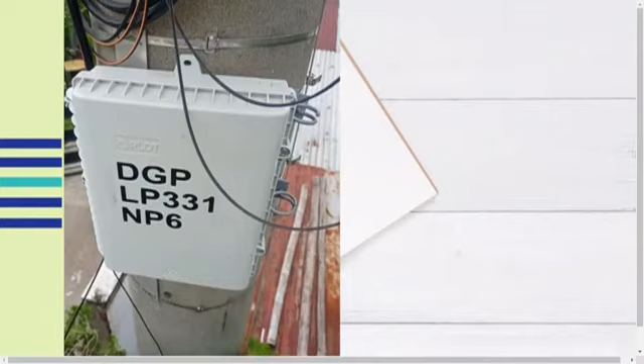Project Zero. Installation procedures. Network access point installation. First and foremost, the technician must test the NAP port using an optical power meter. This procedure is also known as NAP port reading.

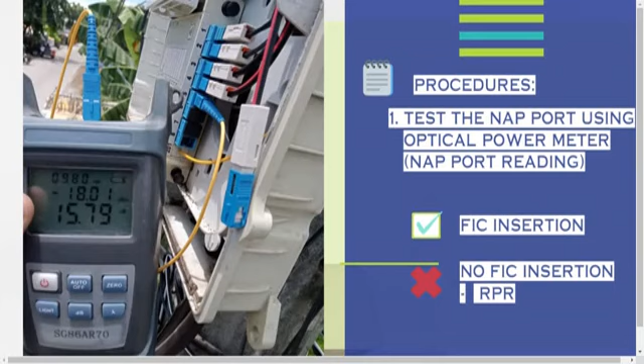The purpose is to determine whether or not the technician could proceed to FIC insertion to port assignment. If the reading is normal, the technician could do the FIC insertion. There are two methods of extraction. Number 1. Using bare hand.

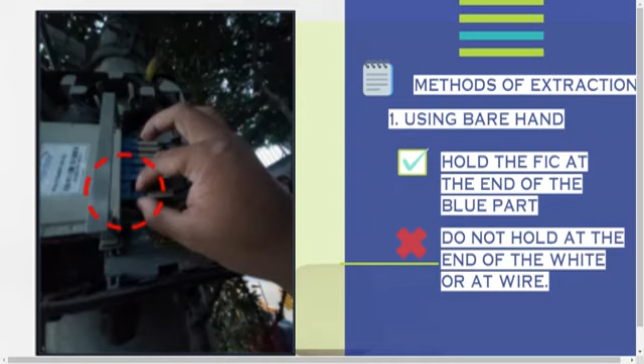Technician must use his bare hand to insert FIC in one port apart. This is done if the NAP has limited space or there are at least 5 line wires on it. How to hold the FIC. Using your index finger and thumb, hold the FIC at the end of the blue or above the white part. Do not hold the FIC at the end of the white or at the wire.

Number 2. Using SC connector extraction tool. Technician must use SC connector extraction tool to insert FIC if the NAP is in full port capacity and double NAP. In using SC connector extraction tool, it should be bent or angled enough to fit in the limited space in between coupler and NAP edge.

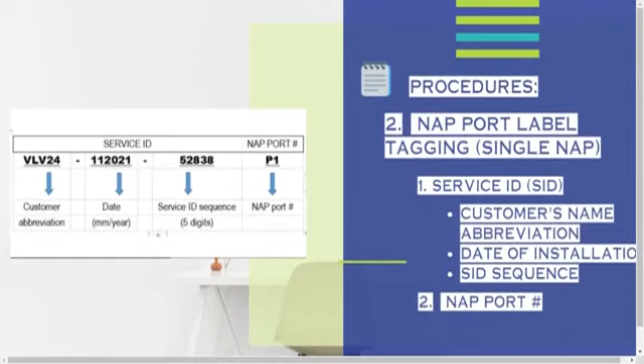If the reading is too high, the technician could not do the FIC insertion, thus falling to RPR. The management requires the technician to take and upload photos of the high NAP port reading on Google Sheet. Second procedure under NAP installation is to do NAP port label tagging.

For single NAP, label details must include the following. Number 1. Service ID or SID, which is composed of customer's name abbreviation, date of installation, and SID sequence. Number 2. NAP port number.

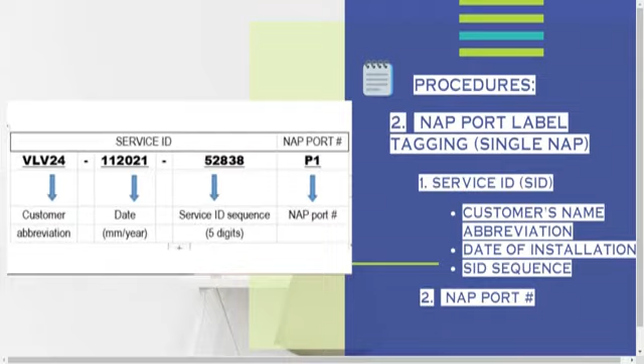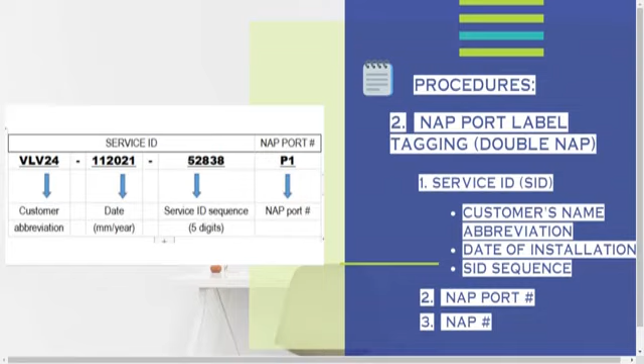For double NAP, label details must include the following. Number 1. Service ID or SID, which is composed of customer's name abbreviation, date of installation, and SID sequence. Number 2. NAP port number. Number 3. NAP number. NAP port label tagging do's and don'ts.

Technician must utilize the following. Number 1. NAP port label details must be printed. Number 2. Use sticker label for NAP port tagging. On the other hand, technician must avoid the following. Number 1. NAP port label details must not be handwritten. Number 2. No using of paper tape for NAP port tagging.

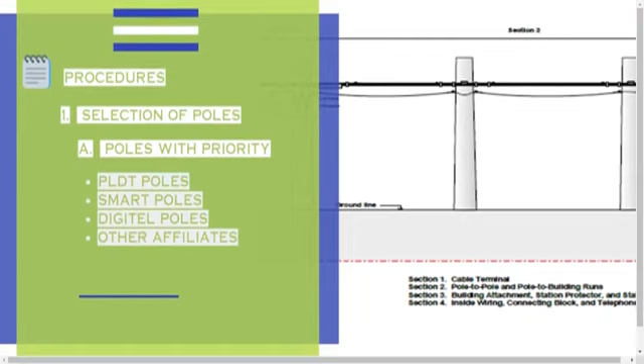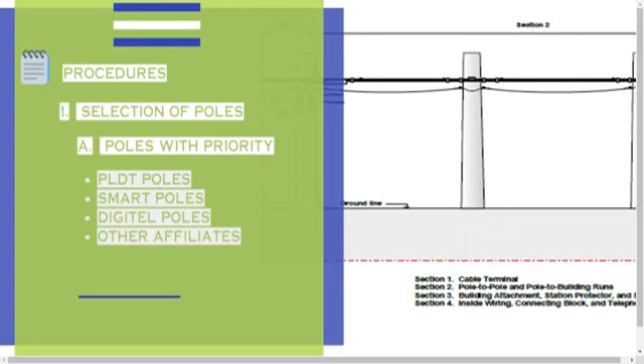Pole-to-pole installation. First and foremost, the technician must select poles according to what the management had notified. Number 1. Poles with priority. PLDT poles. These are poles with painted red or yellow logo on top. Smart poles. These are poles with painted light blue marker on top. Digitel poles. These are poles that have octagonal shape with painted black marker on top. Other affiliates are Clarktel, Subictel, Meritel.

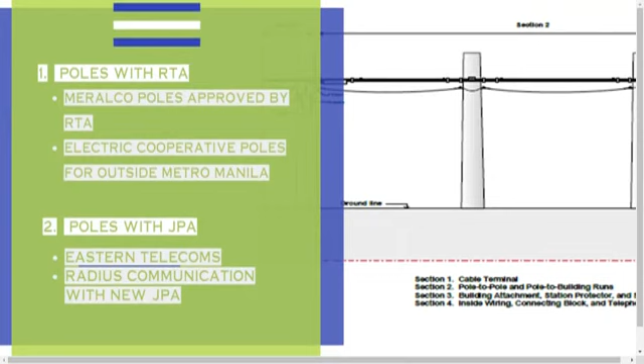Other poles that technician could use are the following. Number 1. Poles with RTA. These are Meralco poles and electric cooperative poles for outside Manila. Number 2. Poles with JPA. Pole-to-pole installation materials and tools needed. F-clamp, tape or cable tie, hook with nut, and mid-span clamp.

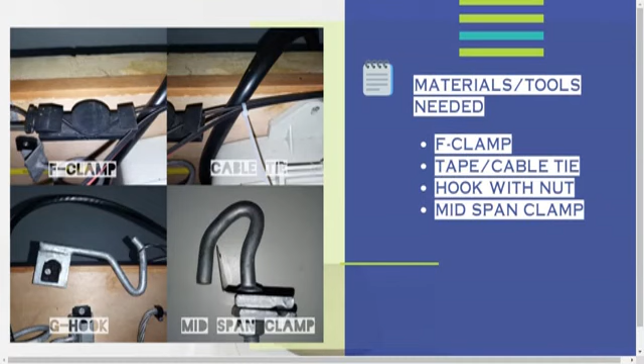Second procedure under pole-to-pole installation is the construction of pole smiley or Mickey Mouse. Technician must provide 4 cable ties to create a pole smiley/Mickey Mouse per techstand. Technician must use 2 F-clamps to release the tension and to prevent macro bend.

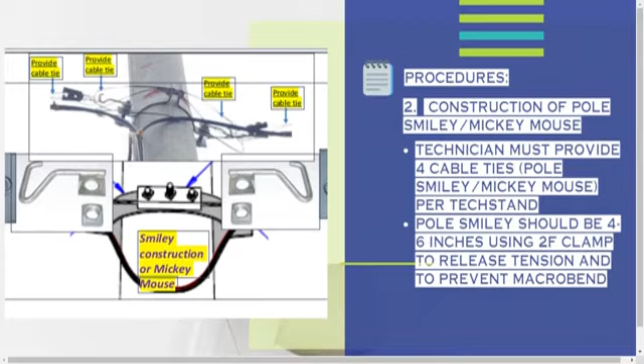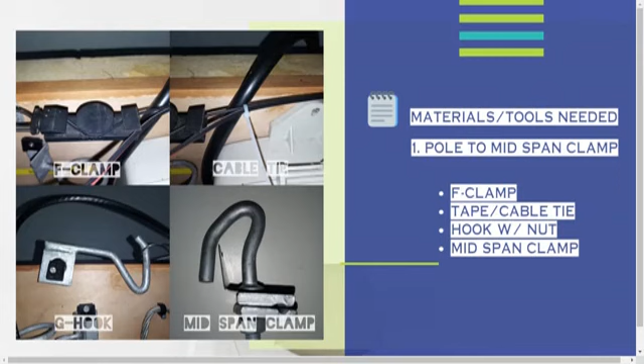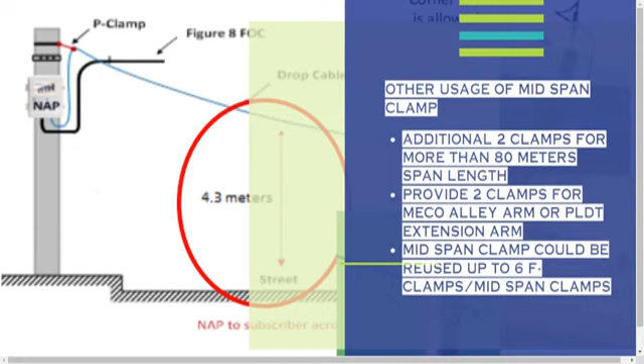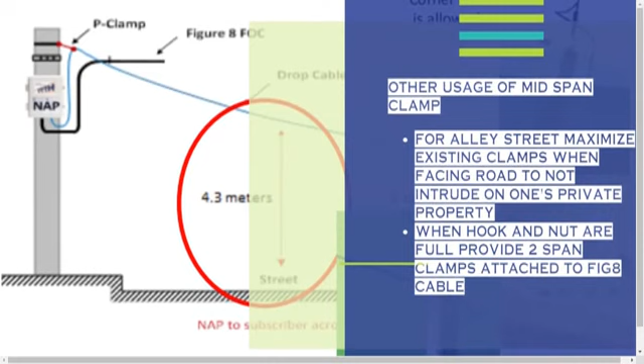However, the number of mid-span clamps needed may vary depending upon the situation. Additional 2 clamps for more than 80 meters span length. Provide 2 clamps for Meco alley arm or PLDT extension arm. Mid-span clamp could be reused up to 6 F-clamps/mid-span clamps. For alley street, maximize existing clamps when facing road to not intrude on one's private property. When hook and nut are full, provide 2 span clamps attached to Fig 8 cable.

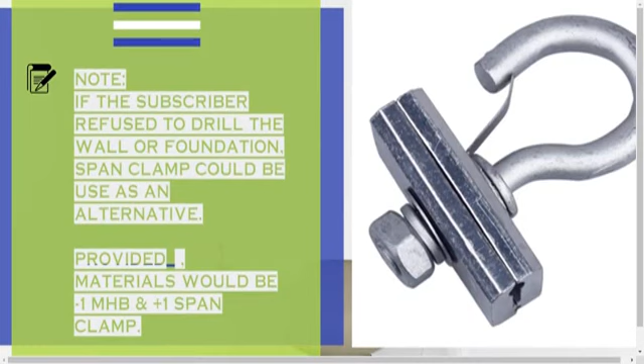Modified house bracket and OJB installation. Quick reminder: if the subscriber refused to drill the wall or foundation, a span clamp could be used as an alternative, provided materials would be less 1 MHB and an additional 1 span clamp.

Technician must fill up a handover form whether it is a new install or repair. Here is the sample PR home handover form. Technician must fill up all the details, especially customer's name, complete address, PID, and PR number. Facility fallout is for RPR only. Technician must fill up the remarks, the reason of fallout or RPR.

Installation details direction. Mark check and provide quantity from sections 1, 2, and 3. Mark wrong and indicate on the remarks all possible substandard reasons. Necessary remarks are the following: actual facility, tagging or service ID plus facility, and NAP and OJB reading. These are the sample substandard remarks.

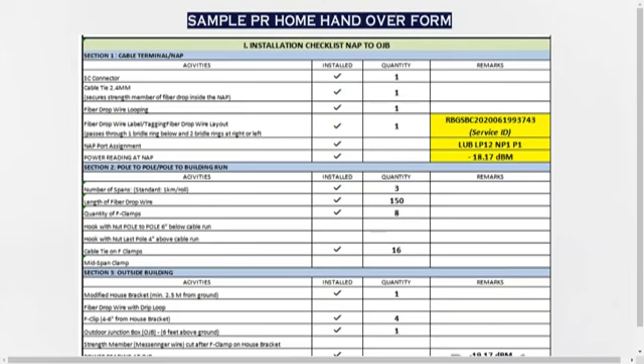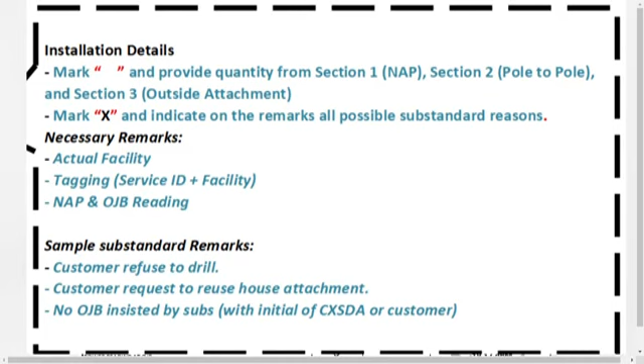Number 1. Customer refused to drill. Number 2. Customer request to reuse house attachment. Number 3. No OJB insisted by subscriber, provided, with initials of CXSDA or customer. Acceptance protocol remarks: 1. If parallel mode, it was tested by PLDT CXSDA. 2. If sequential, within power reading requirement.

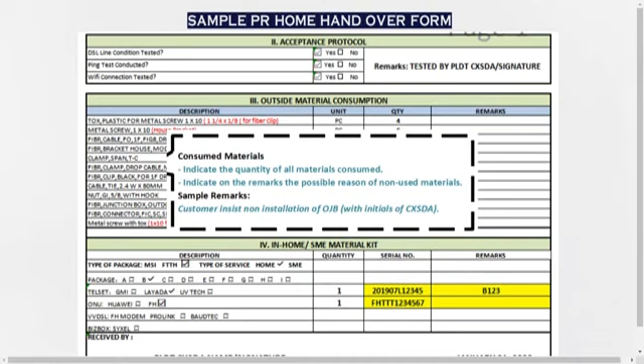Outside materials consumption. Do's: 1. Indicate the quantity of all materials consumed. 2. Indicate in the remarks the possible reason of non-used materials. Sample remarks: customer insisted non-installation of OJB, provided, with initials of CXSDA.

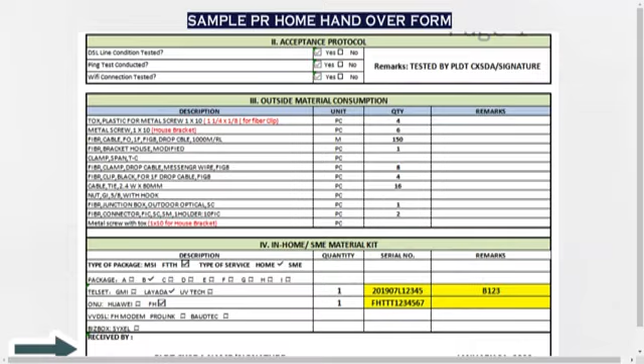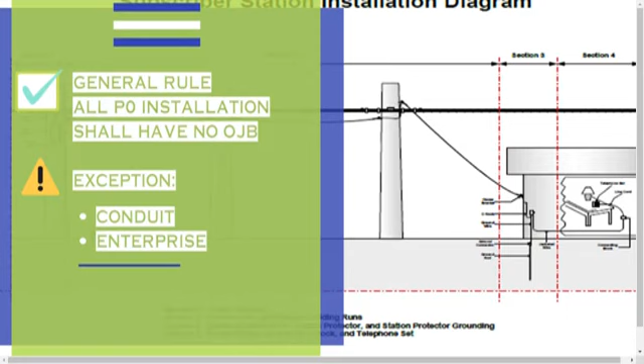Material kitting. Necessary details are the following: quantity of CPE, serial number, package type and number, PLDT CXSDA sign received of kitting if parallel. OJB standards. General rule: all P0 installations must have no OJB. Exceptions: number 1, installation on enterprise, and number 2, installation through conduit, indoor optical outlet or IOO, modem, Telset.

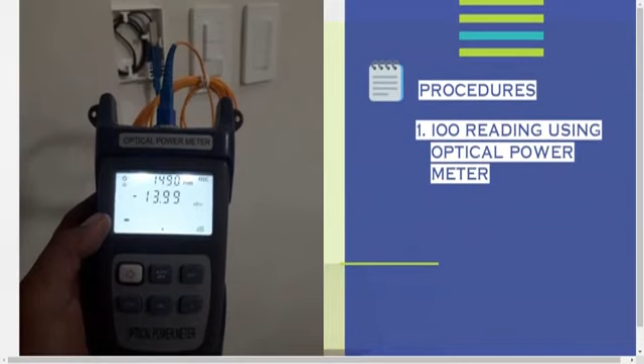Procedures. First procedure: the technician must conduct an IOO reading using an optical power meter. This is done since P0 installation has declared no OJB. Second procedure: technician must do IOO label tagging. IOO label details must include but are not limited to: number 1, service ID or SID, which includes customer's name abbreviation, date of installation, and SID sequence. Number 2, NAP port number. Number 3, NAP CAFAC details.

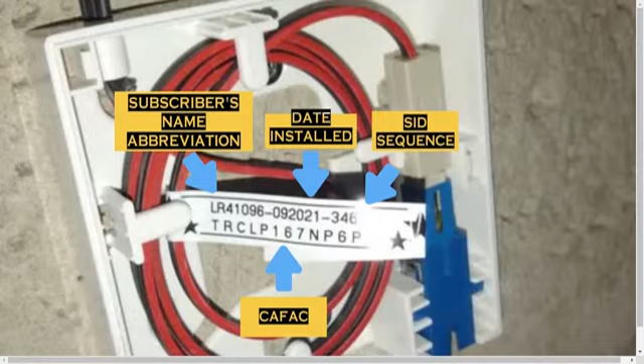Next procedure: technician must do an internet speed test. Conducting an internet speed test is a quick, easy way to take stock of your internet service's performance. If it seems like your internet is slower than it should be, running a speed test is the quickest way to find out if something is wrong on your end, or if the problem is with your internet service provider. Lastly, the Telset should be in a proper location so that the subscriber doesn't have to move the telephone set, which could possibly cause pulling of the cable and problems.

Furthermore, customer satisfaction has numerous benefits for telecommunication operators. It increases customer loyalty. When customers are satisfied, they are likely to stay with a business for long, which boosts sales and profitability.

Verification completion MSI. Go to www.pldt.com.ph/IPMS-mobile. Log in your account of your designated area. Click Non-NT account. Click Sign in. Step 5. Click the top right corner of IPMS, and click Filter. Step 6. All items must be checked, and input your ongoing subscriber's PID or SO number. Then click Apply Filter. Quick note: if you could not find the subscriber, call or ask your designated dispatcher to assign it into your account.

After you dispatch or assign the subscriber into your account, click the top right button. Click Refresh, and do the same process again. Click Filter. Check all the boxes. Put PID or SO number, and click Apply Filter. After that, on the upper part, click Voice. Quick note: we could only verify completion for voice because data is for organic/PLDT only.